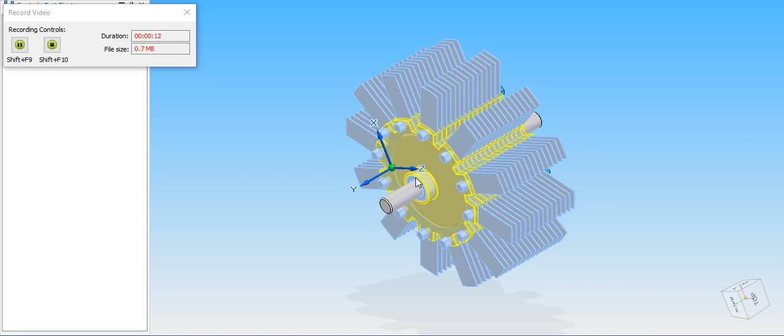Here is the generator, and we will try to explain this generator a little bit better. And that's how it looks like.

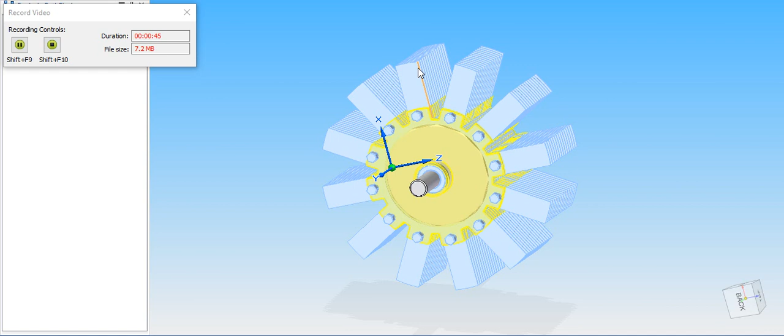These things here, these stars, these 12 stars, this is where you wind the copper wire. This material here is Hiperco 50A, and as you can see, this is the rotor, and there is a pretty thick deal of material between the stars.

The point with this generator design is that the magnetic field will not notice a difference between the stars here and between here. So if the area here between here is thick enough, from there to down to there, there to there, if that area is thick enough, the magnetic field will not notice the difference.

In other words, you will have a cogging free generator that will not have any, how to speak, the magnetic field will not note a difference, and you will have no cogging. So that's some of the point with this generator.

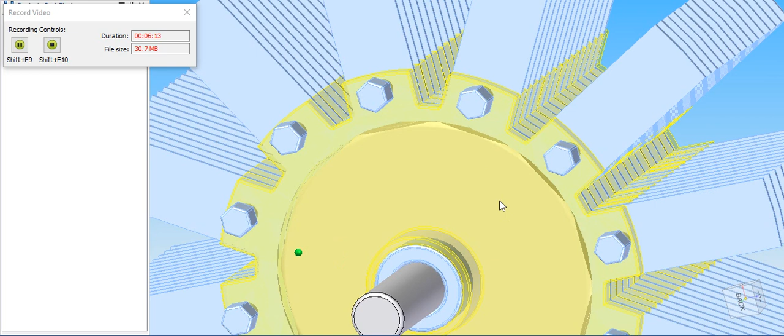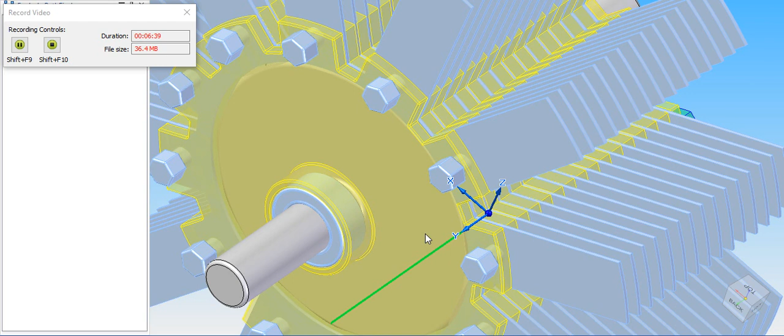So by doing so, I'm creating a Lenz effect free generator, because the copper wire will not break on the magnetic field. So what you see here is basically that, and this generator, I call it a RDM generator. My initials - my forename, middle name, and surname - so it becomes RDM, the RDM generator.

Basically you can see these stars here, and in this area here, from down there you wind the copper wire around here all the way to the top, and you do that on all of these, on every one of these stars.

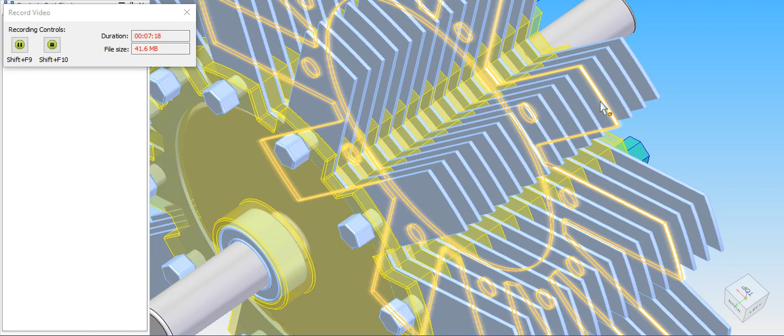You wind the copper wire in such a way that you start here, you finish this star here, and then you go down with the copper wire down there, and then you continue down here, and then you wind up like this, and then when you come to the top, you also make sure you put tape there. You tape the wire down there, and then you start there, and then you wind up.

And you do that on every one of these stars, and make sure that the copper wire is at a distance from the rotating magnetic field, so that it will not create Lenz effect on the copper wire.

Then you have a free energy generator that basically can produce free energy, or produce energy without a lot of need for any input, and of course since the Hiperco material - this one, all this here is the Hiperco material.

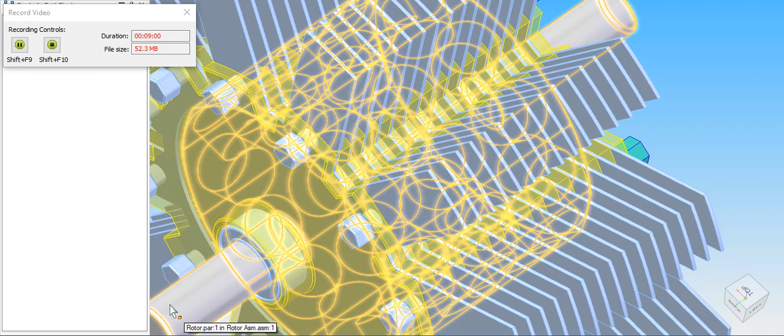Since that is almost Lenz effect free, just like stainless steel, the magnetic field on this rotor in the middle here - that's the rotor with all these holes and rings here, those are where you put the magnets. And those magnets have almost nothing to break on, because the copper wire is moved far away from the magnetic rotating field.

Yet the Hiperco itself makes sure to pulse the coil with magnetic forces, linear standing waves, and that's what produces electrons, or gathering electrons. So this generator here will be very close to a Lenz effect free generator.

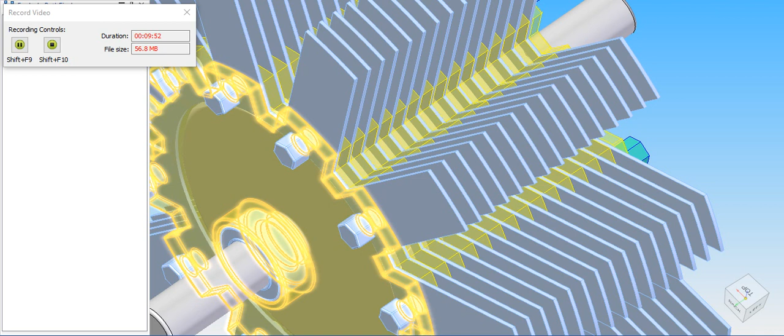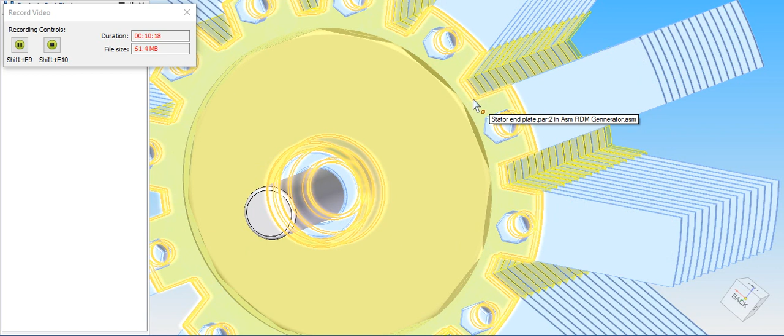If this area here between these stars, between these stars here, if that area here to there is thick enough, the magnetic field will not take any notification on anything. It means the magnet will not attract itself more to the stars than it will to this one. So if it's thick enough here, you will have no cogging effect, which means you will have no vibrations.

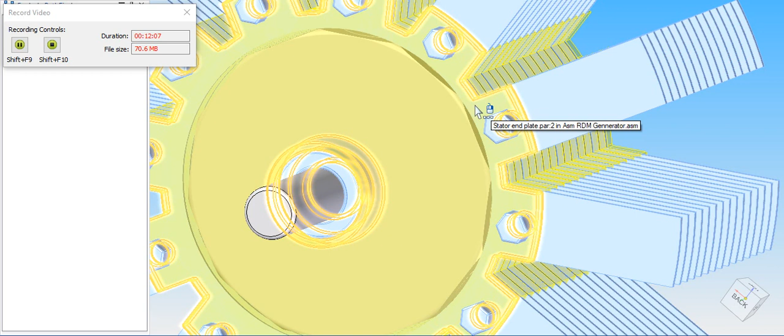It's a very good thing to have no vibrations, because vibrations is sound, and sound is harmonics. If the generator has noise, a waveform in form of sound, you will have vibrations in the whole thing, which will interact with magnetic fields. Believe me, it will, because the material will swing, and that will create bad fluctuation into the coils. So by doing this design, you get a vibration-free generator, because no magnetic cogging and no Lenz effect, or at least very close to zero Lenz effect. So this is a very, very good generator design.

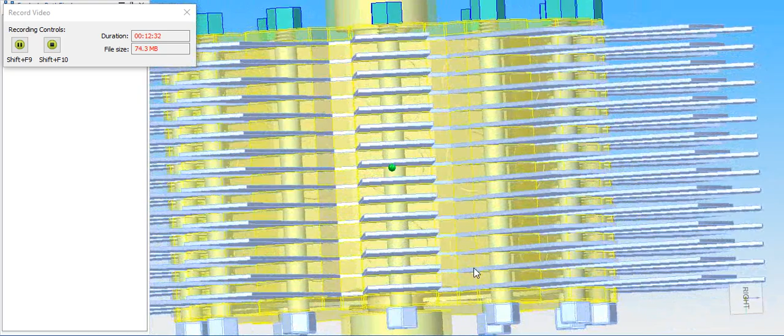Absolutely, I invented this in Sweden just now, 3 months ago maximum. Maybe a little bit more than 3 months, but yeah, something like that.

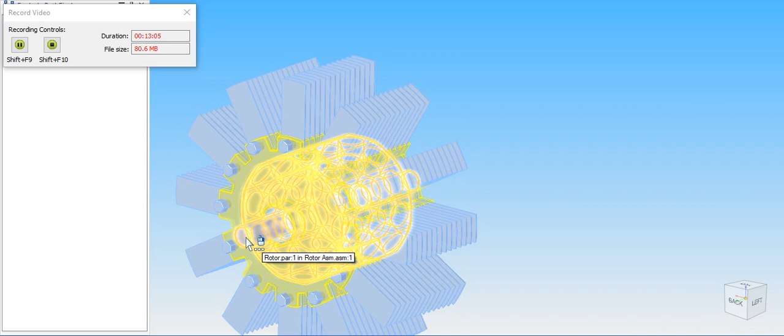The cool thing about this generator is that, except for the rotor, let me see here. Yeah, except for the rotor, which is this one, the whole generator is just made of three identical parts. So if I go here, this is one part, this is the end plate that is lighted up now. That's the end plate that holds the bearing, which again holds the drive shaft. And then you have this plate.

It's a sheet metal plate with 12 stars on it, and in between here you have plexiglass or plastic, 5mm thick, and this Hiperco here is 1mm thick, and this part here is identical with the next part. So it is two parts, the sheet metal in Hiperco and the plexiglass in between. There's only two parts that are replicated all the time, so you only need to make two identical parts, and then you can replicate and make this generator as long as you want.

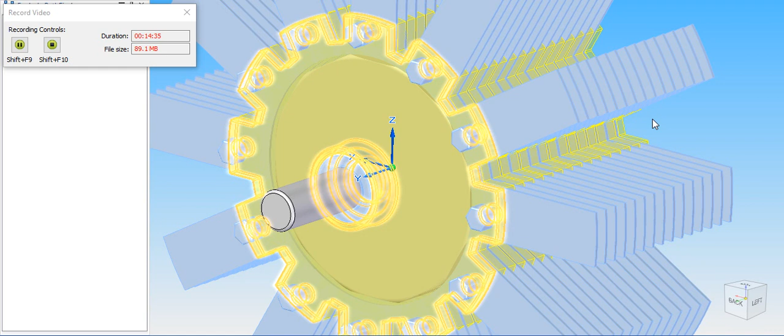I believe it's a unique generator. I do really believe that.

That's the Hiperco sheet that is cut out to become a star, with 12 tongues if you like, and those tongues is where you wind the copper wire. In between, what is marked is the plexiglass, and it has a hole also for the rotor. Then you have a new plate or sheet with Hiperco, and then a new one. So it is only two parts that are replicating all the time. So it's a very easy build, and it doesn't require as much accuracy and precision as the Bill-Muller generator.

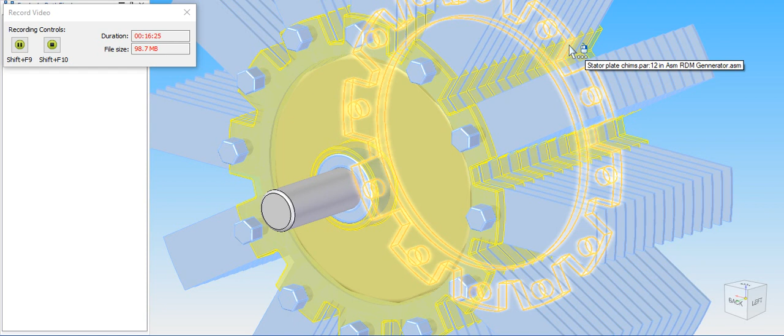The Bill-Muller generator will not turn over unity unless you have extremely high precision on everything. It will never turn over unity. So it's a very hard thing to build a Bill-Muller generator, because it requires very high precision on everything. Adjustments in every direction have to be within 100th of a millimeter. But this generator doesn't need that.

Everybody can build this generator, and everybody can gather energy out from it without a lot of need for high input, because it's a Lenz effect free generator, or very close to being one. The material Hiperco 50A has a lot of hydrogen in it, and because it has a lot of hydrogen in it, the electrons have not so much room to create Lenz effect in the material.

It is hydrogen baked in an oven for 9 hours at 920 degrees Celsius, with air sucked out of the heat chamber, and pure hydrogen is pumped in at a pressure of 20 megapascal.

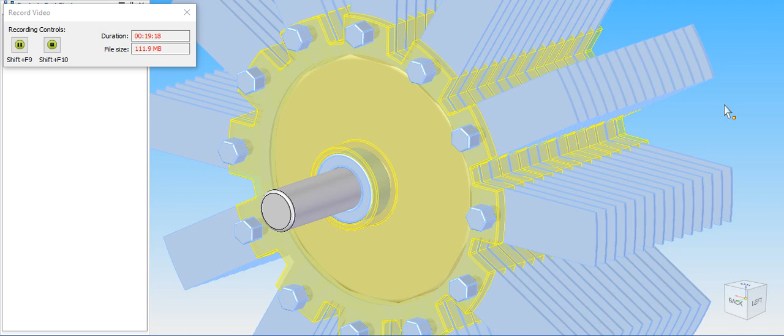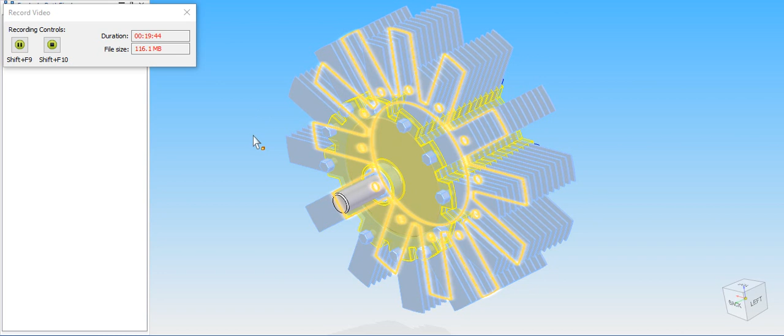So it is really necessary to use Hiperco 50A. Without it, this generator is worthless. You can find Hiperco on Alibaba or any place really in China, any homepage, Alibaba, made in China or whatever.

Okay, so now I'm going to take apart this generator just a little bit. So I'm going here and auto explode it.

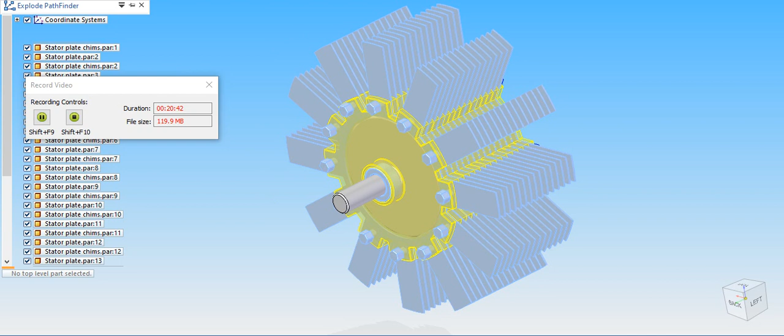I see here why... how did I do that? This is the newest Solid Edge. I'm not used to drawing, doing work in it.

Auto, accept top level assembly, accept, and then automatic explode options, automatic spread distance.

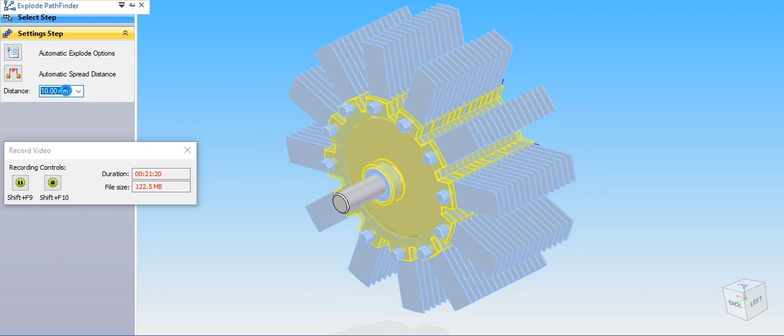Why I cannot... now, let me see now. Okay, now it got spread out a little bit. So I put 10 millimeter distance between all the parts.

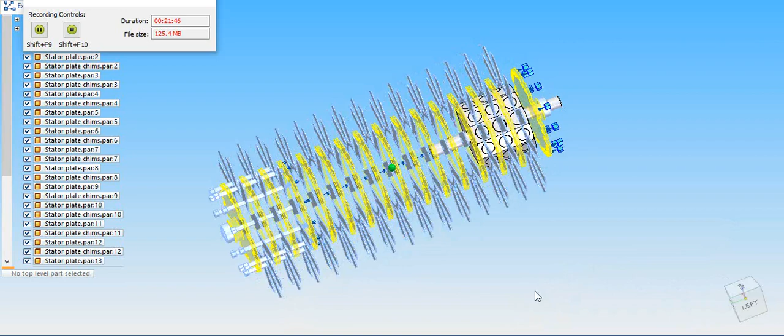Let's see here if we can find, if we can see how it is put together here now. Well, there you see the rotor with the magnets on. You see the end plate with the nuts, and you see the bolts and everything, and the bearings and everything. So that is basically how it looks like.

It is only 2 parts that is multiplied all the time. All the time it is multiplied, and that creates a generator that you can extend and make bigger as you wish, just by replicating 2 parts.

And of course you also have to make the rotor longer, and well, to do that you basically need a longer rotor shaft, and then make a longer rotor where you have the magnets. So that is the...

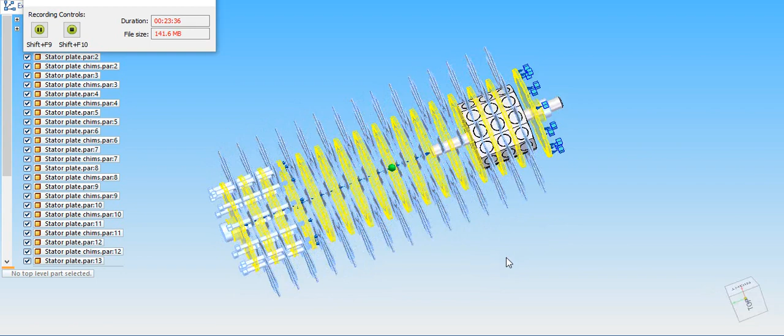The most difficult part by later extending the generator to become longer. You have to have a longer shaft on the rotor to make it longer. So that may require that you need to make a total new rotor. But it is nevertheless a very simple generator, very simple generator.

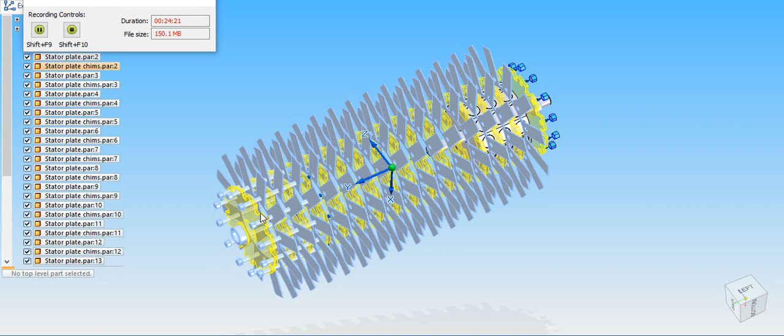You just replicate these 2 parts and go on with it as long as you wish, and then make the rotor accordingly to how long you make it, and all these things here, all these stars here is where you wind a copper wire.

And it's fully possible that, by moving... let's see here if I can go into a little bit of zoom. If ever you discover magnetic cogging, the good thing here will be to...

Change the plates a little bit, these plates here, so that these plates become between this one and that one. So that you spread out the stars so that they come in between each other. That this here will be in between here and there, and then you are guaranteed to have no cogging effect, and that's good, because no cogging equals no vibration.

But you can also make the material between that point there to that point there thicker, maybe as thick as you need to have it to have no cogging effect. And the distance from there to down there can be many inches if necessary.

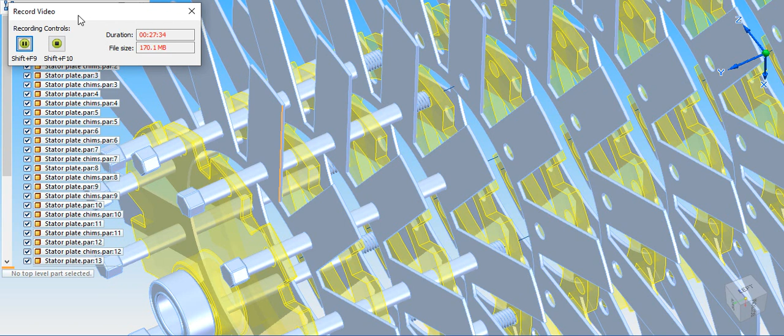Well, you can say that I was the first one to ever put a video on applications for free energy generators. I have long experience with this material in the area of free energy research and free energy generators.

I noticed some drawbacks with the material too, but I have rods 12 millimeters in diameter, solid rods, 12 millimeters in diameter, and 1 meter long rod, and you have a neodymium magnet in one end that is strength N45, 1 inch in diameter and half an inch thick. It can easily lift a carpenter hammer weighing almost 1 kilo in the other end, at 1,000 millimeters distance. That's amazing.

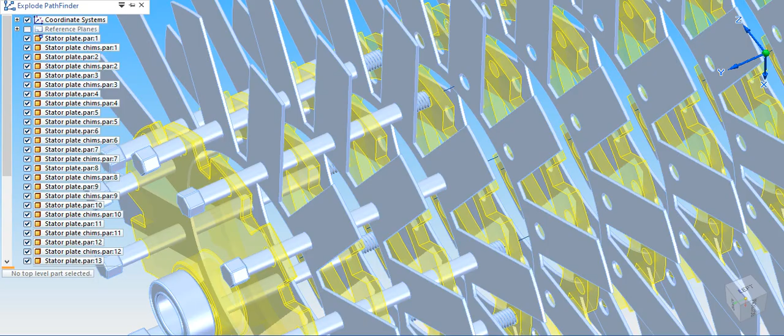So the Hiperco material is just an amazing material. It's a super alloy. There is no other term for it. It is just a super alloy. It's amazing. And for a free energy generator build, it's just a knockout material.

Okay, I'm going to turn it around a little bit, so you can see a little bit here and there. So you see, you have basically this part. I will turn off that. We'll see here what happens. Computer is a little bit slow, I guess.